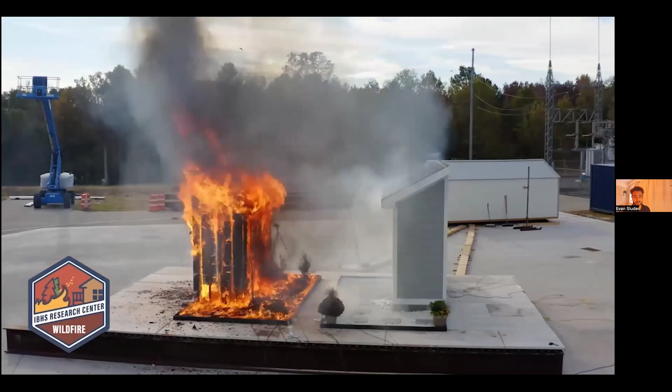IBHS's building safety research leads to real-world solutions for homes and businesses, helping to create more resilient communities. Our unique facility allows us the ability to test at full scale, recreate severe weather, and observe weak links in our structures to understand how failures occur and learn what we can do to prevent them.

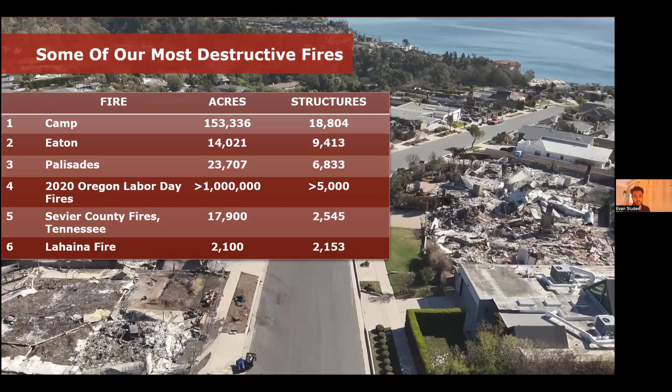Many of the most devastating wildfires in the US have shared a common theme. Fire spreads from the wildlands into our communities, where losses escalate through structure-to-structure fire spread. The Lahaina fire, the Palisades fire, and the Eaton fire each followed this pattern.

They're examples of built environment conflagrations where destruction is driven not only by the advancing wildfire front, but by uncontrolled fire spread between structures. Most of our nation's most destructive wildfires have taken place within the last decade.

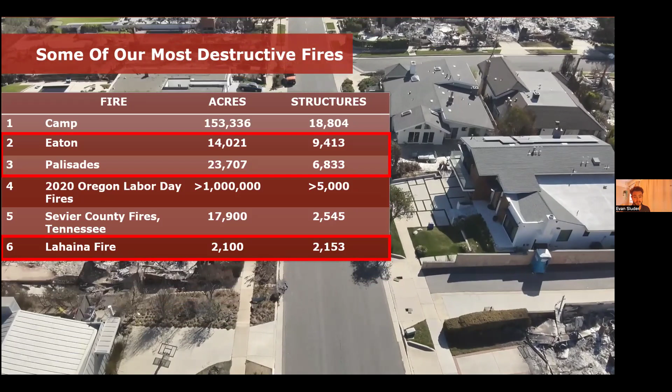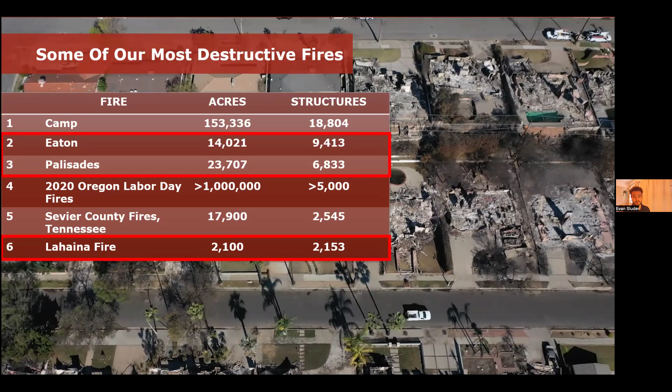From the Camp Fire, the most destructive in US history, to more recent disasters in Oregon, Tennessee, and Hawaii, these fires remind us that large-scale losses are not confined to the West Coast. They can strike communities across the country from the Pacific Islands to the southeast.

When a wildfire enters a community, it can develop into a conflagration. Several factors come together to create these firestorms. To narrow it down, conflagrations follow humans, drought and wind. People account for over 90% of wildfire ignitions, and an increasing population means more people, more structures, and more densely spaced fuels in wildfire-prone areas.

Drought at any scale impacts vegetation and human-made combustibles, making them more receptive to ignition. And wind is the single biggest factor that influences extreme fire behavior, leading to conflagration. So people and wind were central to the outcomes of both the Lahaina fire and the LA County fires. We'll see how these elements came together in each case, shaping the intensity and ultimately the devastation in these fires.

Wind in wildfire scenarios leads to increased ember generation, but it also leads to increased oxygen supply to the fire, which increases intensity, and it also alters the flame shape, stretching it and extending it downstream, and also bending it closer to downstream combustibles. So there's a lot of factors that increase when it comes to the intensity of our wildfire exposures when we introduce wind.

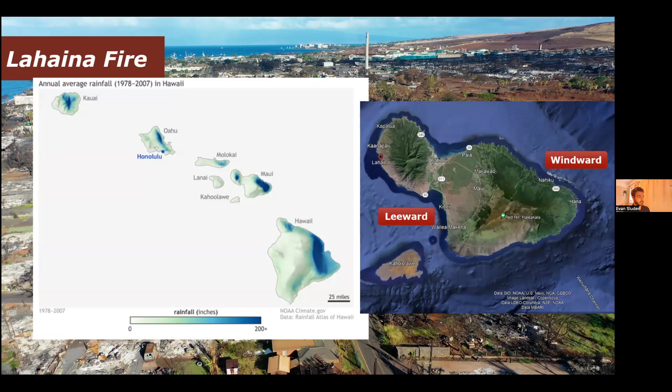On the day of the fire, a pressure gradient from a nearby hurricane significantly impacted wind speeds, resulting in sustained 50-mile-an-hour downsloping winds. Dense development, vehicles, fences, and other infrastructure in Lahaina created pathways for fire spread and ignition sources.

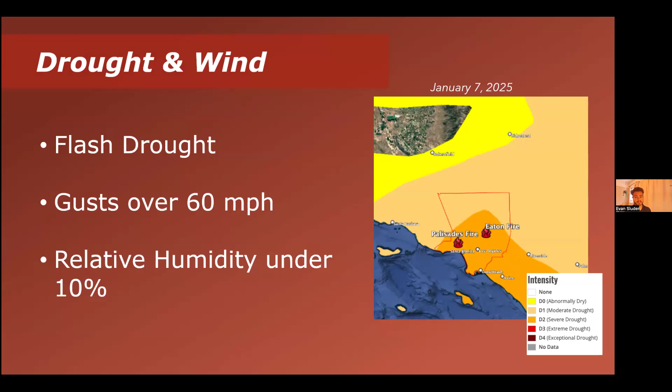The LA County fires were also strongly impacted by humans, drought and wind. Similar to the Lahaina fire, but on a larger scale, the LA County fires had dense development, vegetation, vehicles, fences, and other infrastructure that created pathways for fire spread and ignition. And when the Palisades and Eaton fires ignited, Southern California was experiencing a flash drought, and LA County was in severe drought conditions. A Santa Ana wind event drove wind gusts over 60 miles an hour and dropped relative humidity under 10%, resulting in conditions conducive to rapid fire spread and ember ignitions or spot fires.

To give you some perspective on the intensity of the LA County fires, within the first 24 hours after ignition, the Palisades fire had reached 50% of its final size and 80% of its final size after 48 hours. Similarly, the Eaton fire reached 76% of its final size in 24 hours and 98% of its final size after 48 hours. While these fires continued to burn for more than 40 days, the extreme fire conditions during this initial period led to conflagration and most of the loss caused by these fires.

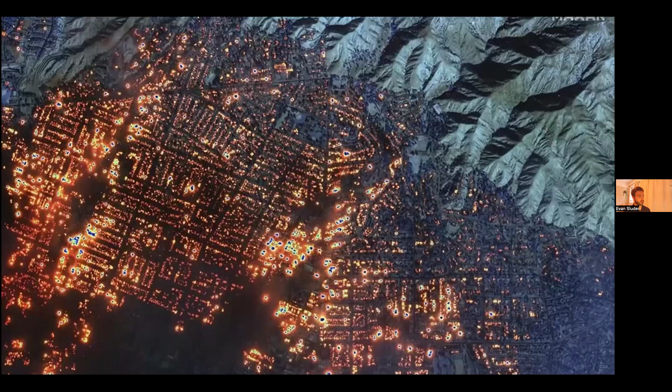All right, so I mentioned earlier the Lahaina and LA County fires had ignitions that originated in wildland fuels and spread into nearby communities. This is a common pattern that can occur many times throughout the course of a large wildfire, as it moves from developed areas to wildland fuels and back to developed areas.

Generally, fires enter through and spread through communities through two primary fire pathways, embers and connected fuels. As communities are initially exposed, structure ignitions via these two fire pathways are a key component of the transition to structure-to-structure fire spread.

Both wildland fuels and structure fuels generate embers capable of causing ignitions, but we know that structural fuels produce larger and more numerous embers than vegetative fuels. The more structure ignitions that occur, the more significant the ember exposure is.

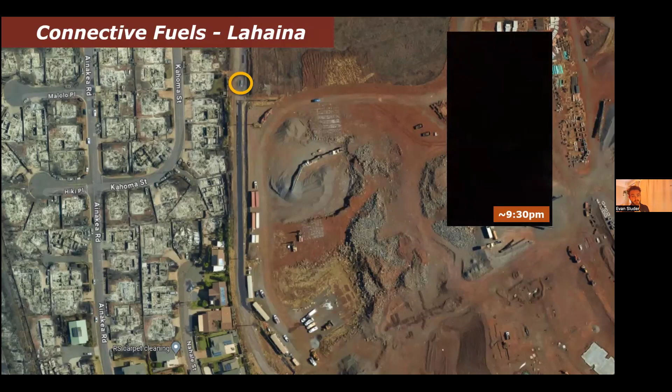Thank you. So this next video provided by a homeowner in the Lahaina fire displays how connective fuels can provide pathways for fire to enter communities. In this video, what you're witnessing is that transition from a grassland fire with their wildland fuels to structural fuels. And in this case, this grassland area at the top of the screen spread the fire down to this roadway, and there was a parked vehicle on that roadway.

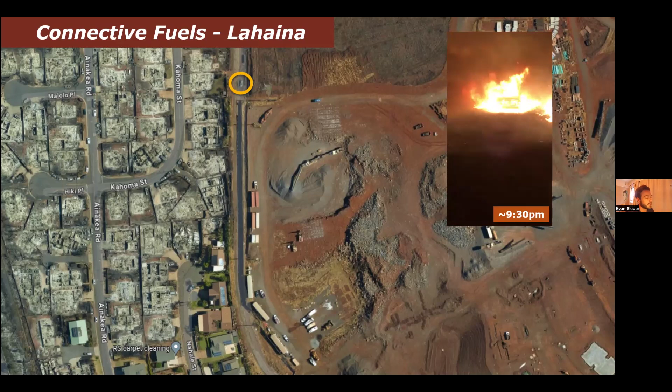That vehicle ignited and provided a very intense pathway for fire to then expose combustibles and other materials located at the back of the parcels shown there in post-fire imagery. If we take a look at pre-fire imagery, the vegetation and structural fuel loading on those parcels is more apparent. And what this does is it just essentially provides more fuel and then a closer fire exposure to those structures and provides a way for this fire to jump over this roadway.

With grass fires, normally we see very small embers, and it's more difficult for these embers to transport and cause ignitions. But when fire can provide direct flame contact to something like a vehicle or a structure, that's where we see some of our highest fire intensity and exposures. And even resilient building materials and other materials in these conditions will ignite. And once that fire was able to pass to the rear of those parcels and ride combustibles up to structures, we saw our first ignitions in this part of the community and a transition of structure to structure fire spread.

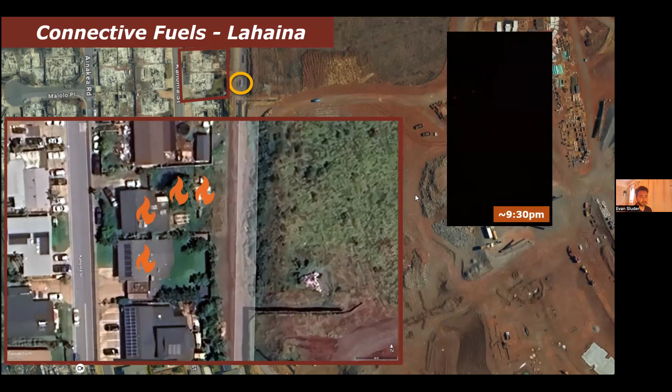So using DINS data from the LA County fires, we can visualize examples of these fire pathways and the transition to conflagration. Studies of past conflagrations and the observations by the IBHS team in the Eaton and Palisades fires revealed two distinct patterns in the destruction. We see sporadic losses where smaller clusters of homes are burned, and we see large-scale urban conflagration, driven by structure-to-structure fire spread, resulting in widespread devastation. These patterns were both visible in areas of LA County during our investigation and give valuable insight on these fires.

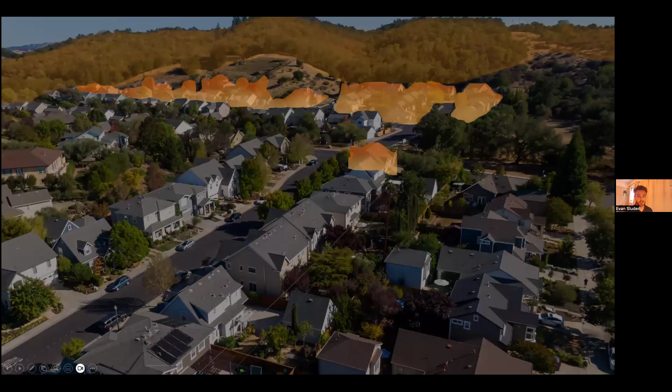Moving further into the community, we observe the second pattern, large-scale urban conflagration driven by structure-to-structure fire spread, resulting in widespread devastation. As more and more structures and structural fuels become involved, we see compounding exposures, more intense structural embers, and direct flame contact and radiation from ignited structures, leading to widespread devastation. Once a fire is inside a community, the ignition of structures shifts the fire from wildland fuels to structural and urban fuels, as we just saw.

In these cases, wind-driven structure-to-structure fire spread is influenced by three main factors. Our structure density, how closely spaced our buildings are. Our connective fuels, the different combustible items between our structures, whether they be human-made sheds or things of that nature or vegetation. And then finally, our building materials. How resilient are our building materials and what types of exposures can they withstand without igniting?

Our investigation of the Lahaina fire helped identify these three key factors of conflagration, and our most recent survey of the Eaton and Palisades fires reconfirmed a lot of what we observed initially. On both fires, our teams looked at the influence of fuel factors, building components, and structure separation, utilizing data collected in the field, pre- and post-fire imagery, and DINS data on the Palisades and Eaton fires. All right, so now we'll go through each of these factors individually, highlighting analysis and imagery that illustrates how they impact ignition and loss. And we're going to start with structure density.

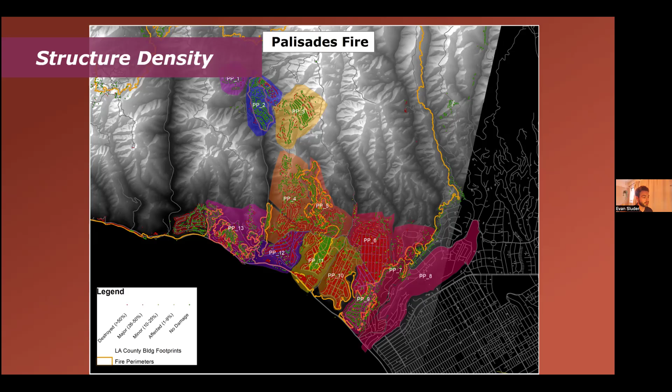All right, so again, this is an analysis that was completed on the Palisades fire, and this is some of our preliminary detailed analysis of the LA County fires. So clusters of homes were grouped by neighborhood, as shown in the image above. And for each cluster, a mean minimum structure separation distance was calculated utilizing structure footprint data available online. And incorporating DINS data, we're able to plot mean minimum structure separation distance in each of these neighborhoods or communities against the percentage of structures that was destroyed in each community.

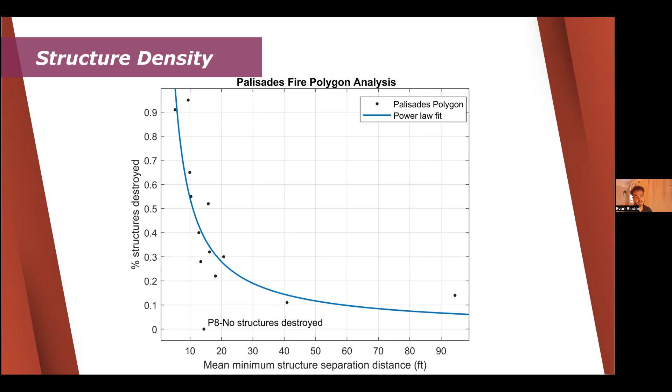And what we're able to observe is there's a very strong relationship between structure separation distance and the percent of structures that were lost in each of these communities. And what we see here is that when we look at structure separation distances on the order of 10 feet and less, we see very high percentages of structures destroyed within these communities. As we start to increase structure separation distance to 20 feet and above, we see a very steep decline in the number of structures that are destroyed.

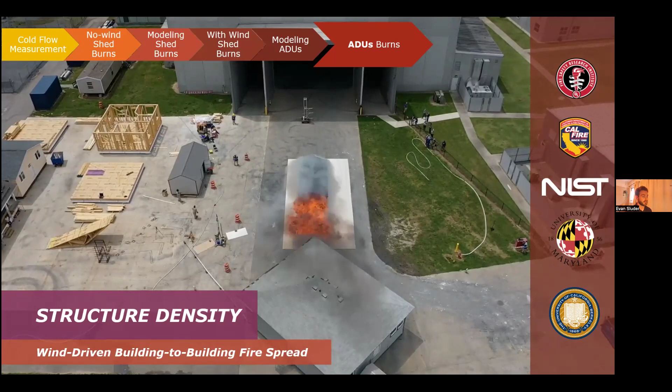This relationship between structure separation and exposure and damage is something that we've been studying at our laboratory facility in South Carolina, and it's been our latest full-scale research project. This project has helped us better understand the influence of structure separation, orientation, and wind speed on the likelihood of ignition or loss in wildfire scenarios.

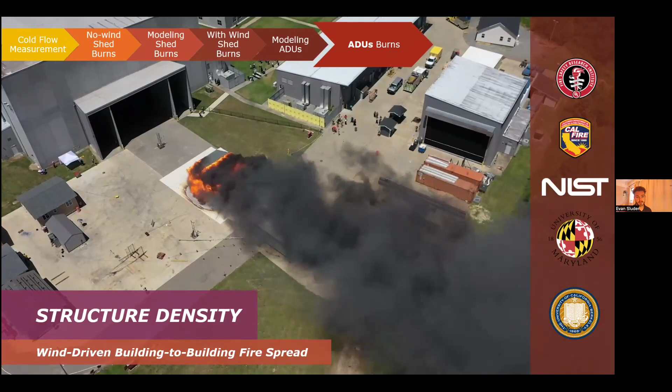In the analysis of these experiments, one of our goals was to understand how damage intensity varies rather than just a complete loss or no damage. So adding more granularity to the types of results that we see from these exposures. And in order to do that, we separated out damage categories from these tests into 5 different categories. So total loss, where we see ignition of our target structure in a manner that means that we have to intervene in order to prevent that structure from being completely consumed.

And then we have potential total loss, where we see key components of our exterior envelope fail, like glazing or vents or things of that nature, where large openings are created in the exterior envelope that make the structure vulnerable to ember intrusion or flame intrusion. And then severe damage and minor damage include primarily aesthetic failures, charring of the exterior siding, bowing, or cracking of the siding, things of that nature that would require repairs, but don't immediately put the structure at risk of loss.

And then, of course, no damage. The results that you're seeing on the screen right now are from the initial phase of our structure separation experiments, where we tested fuel loads within shed structures at different wind speeds and separation distances from our target ADU. And two key things I want to point out here.

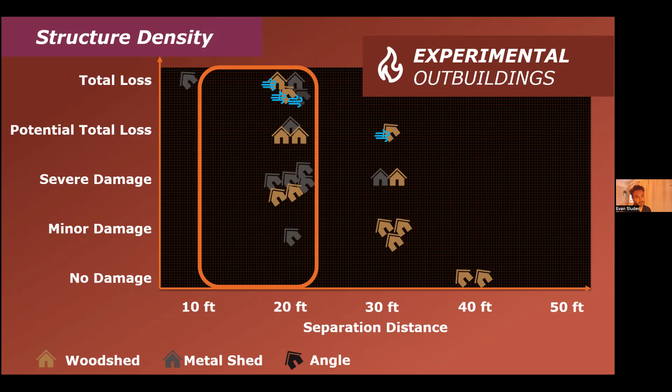With this increased wind speed, what we observe is the necessary structure separation distance to reduce the exposure increases. So that wind variable has the capability again to drastically increase the exposure that we see in these fires. This damage pattern held when we were in Lahaina. A lot of the neighborhoods and communities that we saw with average structure separation distances of 10 or 20 feet resulted in total loss.

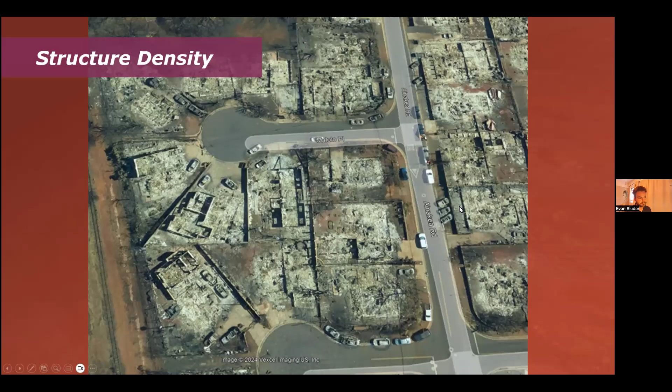This again aligns with the results from our experiments. Extreme exposures generated by structural fuels and high structure density overwhelm even our most resilient building materials. When our intensity of exposures is so high, we lose the ability to make an impact on our structures through increased resiliency in our building materials.

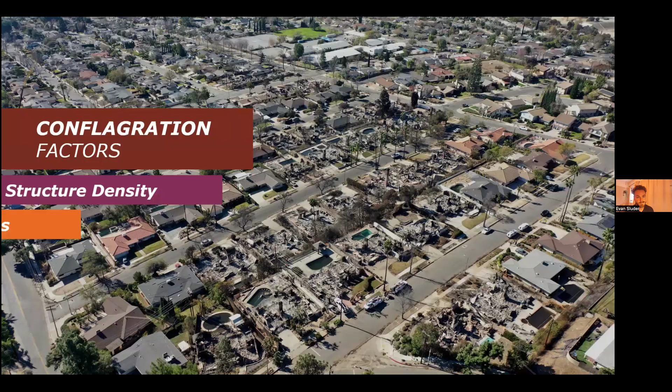All right, next we'll discuss connective fuels. As we have already said, connective fuels provide a pathway for fire to move into and through our communities. When we think about fuels in wildfire, we often picture trees, grass, and shrubs in the wildland. But in conflagration conditions, it's important to recognize that all combustible materials, both vegetative and human-made, are part of the risk.

This includes things that we don't normally think of as fuels, such as privacy hedges shown here, ornamental plants, wood fences, landscaping mulch. These are all connective fuels capable of carrying flames directly from one structure to another. The video shown was provided by CAL FIRE and gives an example of how privacy hedges, which were very common in both the LA County fire and the Lahaina fire, give fire a pathway between structures and are a receptive fuel for ember ignitions, which required attention from firefighting resources in that second video shown there.

Human-made fuels are also a risk. Commonly observed connective fuels included trash cans, sheds, fences, patio furniture, decks, hot tubs, and even vehicles, which were a primary connective fuel in Lahaina. The key point here is that under extreme conditions, any combustible items can connect fire from house to house.

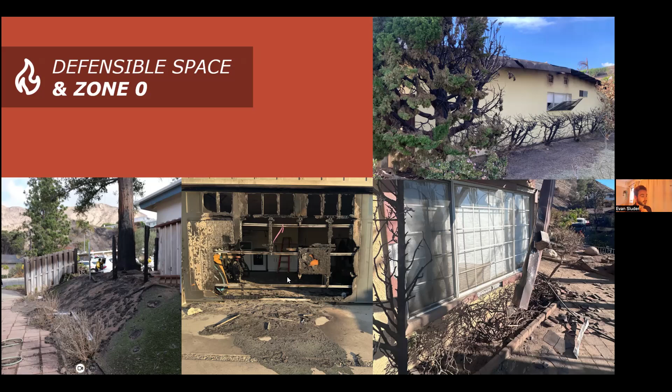trash cans were vulnerable to ember ignition, not because the plastic itself was igniting, but it was melting and allowing embers to enter the trash bins. And then the trash itself was actually the combustible that was producing very substantial exposures to structures. And also, embers were capable of igniting trees as well that were within our zone 0.

This is an example from the Lahaina fire, again provided by a homeowner there. And one thing I want to point out in this video is how close some building materials can get pushed to the point of ignition, and the presence of small combustibles, which may seem like small vegetation not capable of producing high heat loads, can cause ignition.

What's happening to the structure in this video that we're looking at here, the gases that are coming off of the siding and the fascia board there, those are combustible gases. When fuels are preheated to the point that we see often in high intensity fire exposures like this, they reach a point where they begin to break down and off-gas combustible gases. And those gases mix with oxygen in the air, and essentially they're primed for ignition. So even something like a small ember or a very low intensity fire has the potential to ignite the side of that structure in this instance.

In our post-disaster investigation of the Lahaina fire, we focused on the role of fuel coverage within Zone 0 and how it influenced loss. We observed a clear pattern. When vegetation coverage in Zone 0 exceeded 60%, the likelihood of destruction was 3 times higher. This underscores the critical importance of keeping Zone 0 free of combustible materials. Even in large-scale conflagrations, conditions in this small area can be the difference.

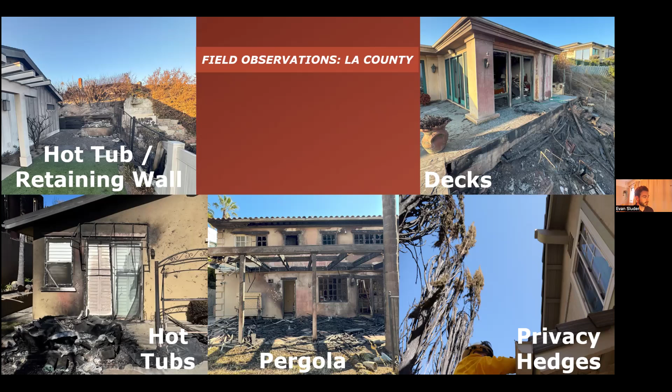Right, so a few examples in this slide here that I want to discuss. A few examples of successes as well. So in the top left corner here, we had a hot tub and retaining wall ignition. This corner of the house actually had a pretty good zone 0. Both a retaining wall and that hot tub were outside the first 0 to 5 feet. And despite this, a very intense exposure was provided to the structure, but non-combustible exterior siding, double pane tempered windows, and enclosed eaves helped this structure resist that exposure.

However, in a situation over here, the ignition of a deck resulted in direct flame contact to some double pane tempered glazing of that exterior portion of the structure there. And even that resilient glazing and non-combustible exterior siding failed in that exposure and resulted in a large opening in that exterior envelope.

Another example of a hot tub here. In this instance, the wind would have been pushing out of the photo here, so not exactly sure how that would have worked with that recirculation around that corner. It would have been a very complex flow, but could have reduced the exposure. But again, failures in the exterior openings, this structure was pushed to the absolute brink.

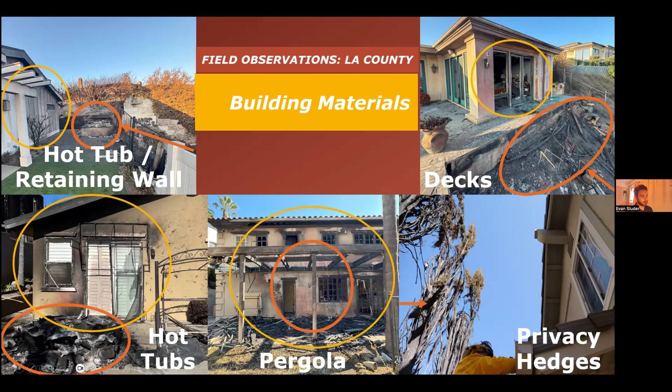Pergola exposure here, and again, privacy hedge. Outside of zone 0, thankfully, but again, pushed this double pane window, thankfully, to the limit.

In Lahaina, we observed the impact of Class A roof cover. Our analysis showed that homes without Class A roofs were destroyed over 80% of the time. Combustible roof coverings are particularly vulnerable to embers, which we know are the leading cause of ignition in large wildfire events.

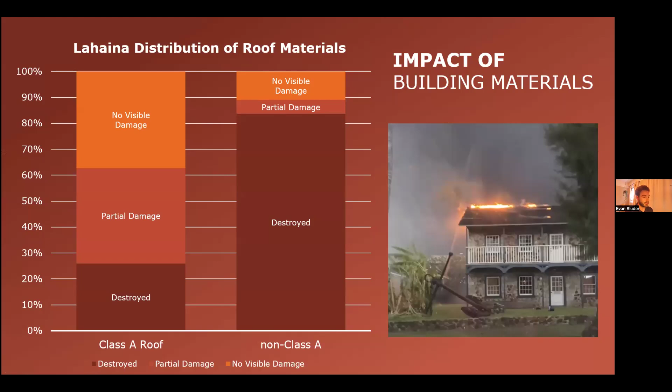We've also been able to observe the positive impacts of mitigation. Many homes that incorporated risk reduction measures, intentionally or not, showed improved chances of survival. However, a recurring pattern emerged. While some structures had addressed large portions of their potential exposures, they still had critical vulnerabilities that ultimately led to

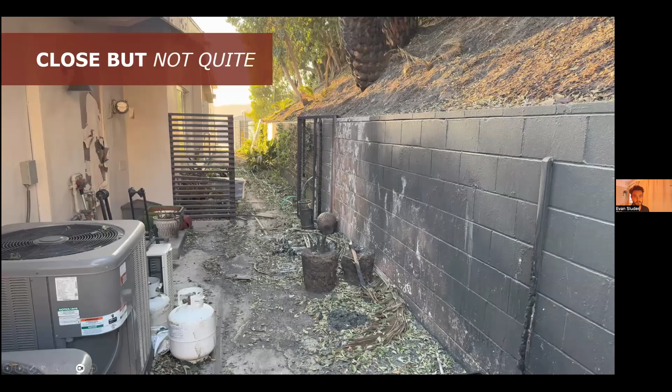ignition. So this structure incorporated a non-combustible zone 0 for a couple sides of their structure, but had an ignition of combustible materials stored against the side of the house at the rear of the property, which resulted in a very high fire exposure to this door here and ignition of the fascia board here. Some water spray patterns on the rear of this structure and the fact that this ignition was extinguished indicate that firefighter intervention was again responsible for this structure not being a total loss.

But mitigation can give homes a fighting chance. This structure featured a mostly complete non-combustible zone 0 on either side of the structure. And they also benefited from CMU block wall shielding. So shielding in this instance talks about how large non-combustible features like this wall can mitigate a lot of the heat exposure to our structure. But again, this is a successful instance of lack of connective fuels and reduced fire exposure, preventing ignition.

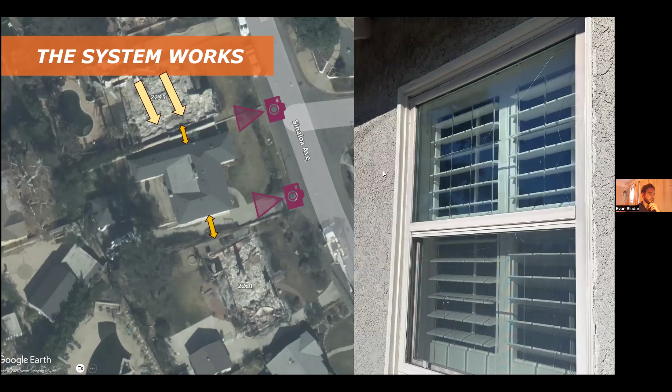But that being said, these exposures are intense, and it only takes one building component failing to have the potential for ignition. So in summary, we have observed that protecting a structure and reducing the likelihood of ignition means that our structure and the immediate surroundings need to work together. To protect our structures, reduce potential fire exposures, and increase resilience, we need to simultaneously reduce exposure by removing or relocating fuels and increase our structure's resilience through hardening the exterior materials to resist what exposures remain.

Focusing on exposure reduction or increasing resilience individually is not a practical or achievable solution in many situations. We know that since embers are capable of traveling so far and are so prolific, we always anticipate structures to receive an ember exposure in a wildfire event. So we always need to be wary of those. But we also want to make sure that our houses are livable and appealing. So we do want some form of vegetation or other combustibles on our parcels.

And increasing resilience alone is also not an achievable or practical solution in many instances. Constructing our materials out of concrete block or as a bunker capable of withstanding any type of wildfire exposure is not aesthetic or cost effective in many instances.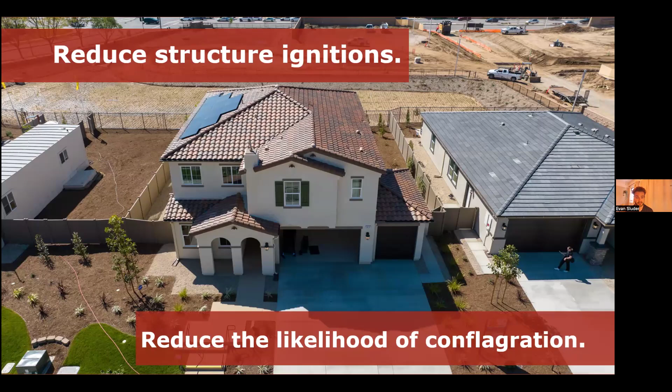So just take a final second here to acknowledge what we just discussed and what it tells us about our collective effort to reduce risk in these scenarios. We need to focus on preventing ignitions. Every ignition prevented, especially at the early stages of fire development, creates significant differences in downstream impacts. Reducing ignitions of structures is key in mitigating the conflagrations we have seen in recent years.

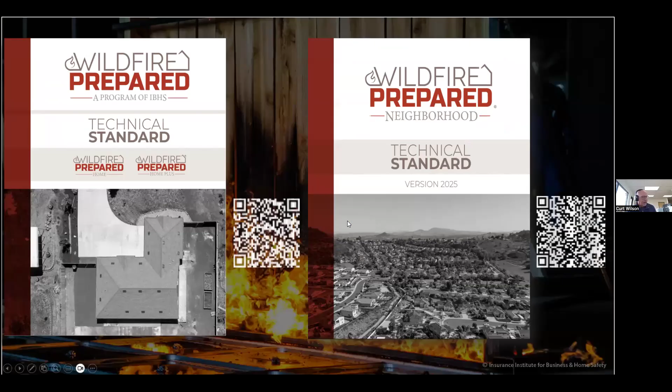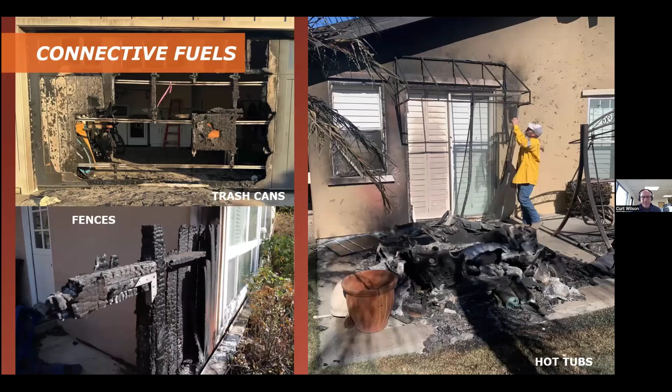Evan, that's really great and some really wonderful information. Before we stop sharing screen, you had a slide near the end of the structure density section, and it was showing a graph implying kind of levels of risk. It was more of a bar graph, and it had roofing at the bottom in terms of the way it was formatted. This one right here. Yeah. Can you talk a little bit more about this?

It's interesting that roof material is listed. As I'm understanding this, this is a lower level of importance, but we often hear roof materials and Class A roofs as an important criteria. So help me understand what is the message of the information in this slide.

Absolutely. So this is definitely not to say that roof material is not important. Going back to that other slide, when we did have combustible roofs, we saw loss almost every single time. This analysis is mainly just to show what factors were most important across our whole data set. So there's two things going on there. One is how dependent loss was on structure separation distance. Structure separation distance was so key in whether or not we saw loss across our data set that it turns out as the most important factor, dwarfing all of the other factors.

The other important part is most of the roof materials that we observed across our data set were asphalt shingle, tile, other things of that nature. And for those roofs, roof material wasn't a key factor. So the percentage of our data set that was combustible roofs was a smaller percentage. Okay. So a lot of those materials were Class A, presumably, so their impact wasn't much of a distinction.

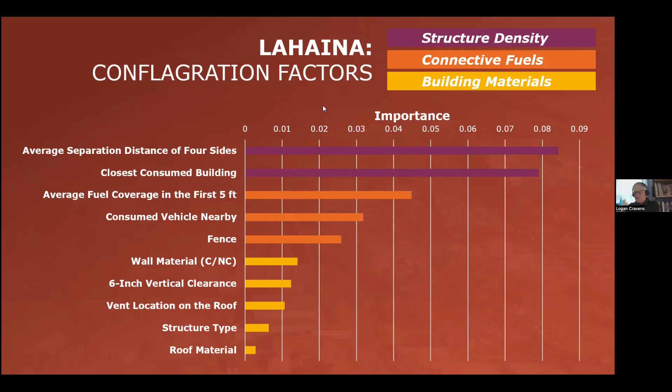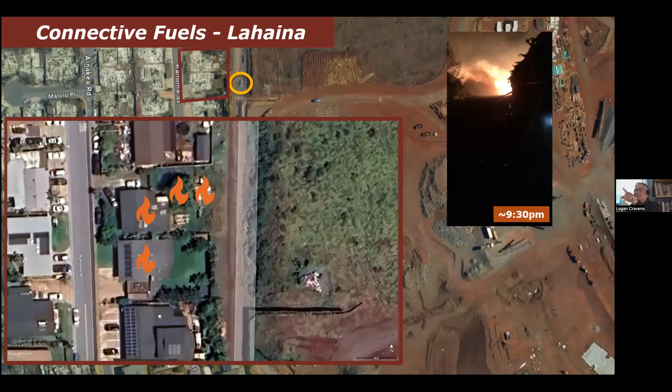It's really hard to say when we look at it at this scale. People really get hung up on, oh, this one home survived, or this one group of homes survived. Like, what aspect of these building materials or this specific setup resulted in these structures surviving?

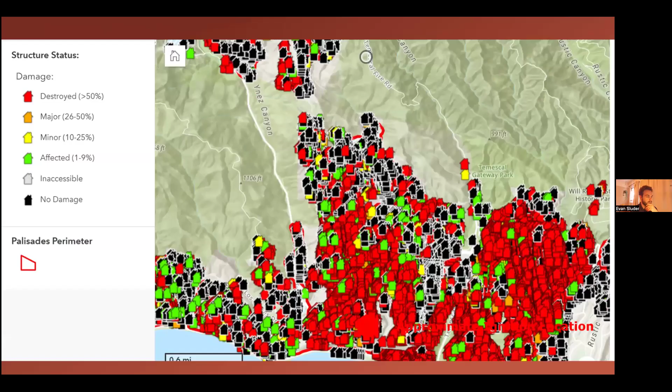So even in a retrofit aspect, if we're addressing our ember exposures and those wildfire pathways, we make a huge difference on those initial ignitions. And if we have fewer initial structure ignitions, our firefighting resources are more effective. Those cascading effects happen slower, and we see significantly lower impacts in our communities. Even if you go to that slide with the DINS data in the first section, you'll notice we see cascading effects where we have one ignition.

So if our prevailing wind direction is this way, you could hypothesize that maybe we had fire in this vegetative area here. These three structures ignited. Embers were pushed downstream across this street. All these structures were ignited, and it continued to progress. But if we had addressed just ember exposure for all of our homes in these areas, these three homes may have ignited due to connective fuel direct flame contact. But at this roadway, we get a 60 or 70-foot structure separation distance.

If you remember from our experimental research or the analysis of structure separation in the Palisades neighborhoods, when we have structure separation distances on the order of 30 to 40 feet and above, we're not seeing structure flame spread. What we're seeing is ember ignitions moving that fire along over these roadways and through our communities. But just addressing the embers, this might stop here. We lose four structures instead of the tens of structures that ignite here, and all the exposures these structures then push further downstream.

Great. Yes, thank you. I wanted to ask something similar. Codes basically can require greater distances and materials, but it's the existing buildings that basically kind of give me concern. And I was wondering if there's any data on what percentage of a community needs resilient buildings to have some sort of effect? So if it's just one or two houses that do this, it's not going to have much effect on the community level. If it's 25% or 50%, is there some data that shows how much protection could be had?